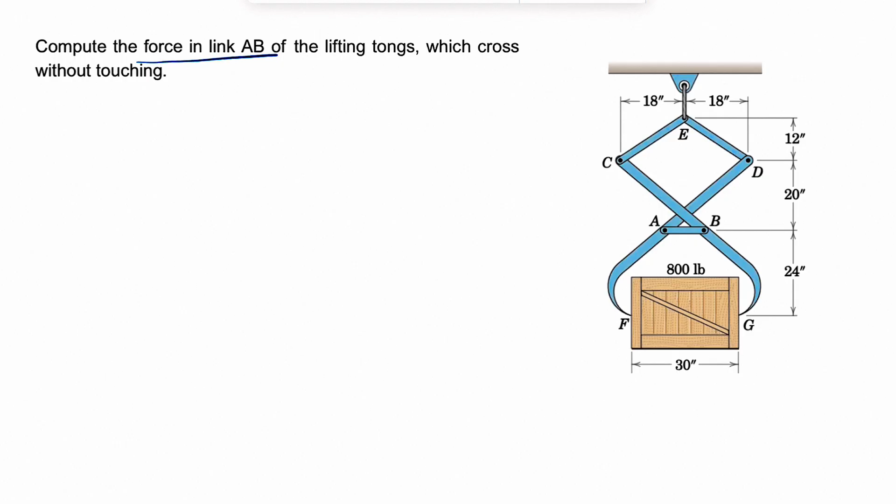Okay, so welcome back. We're going to be solving another question from chapter 4 of Engineering Mechanics by Meriam. In this one, we need to compute the force in link AB of the lifting tongs, which cross without touching. We're going to go with our equilibrium assumption, and we need to dismantle the system first of all. And what I'm going to do is draw the free body diagram for this part of the system.

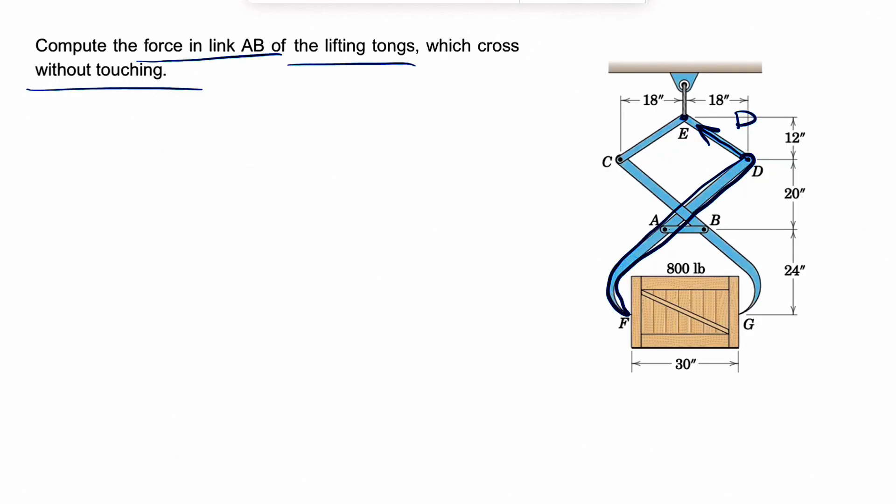And at point D, if we look at it, we'll see that we have a two force member DE, which means our force will be along this link ED. We can call it D. And we also have another two force member, which is the link AB, and that's what the question is asking us. So we're going to consider one force AB, and we have the forces at point F. We're going to consider two forces Fx, Fy, and we have our equilibrium equations. Sum of all forces in X equals 0. Sum of all forces in Y equals 0, and we're going to have one moment equation.

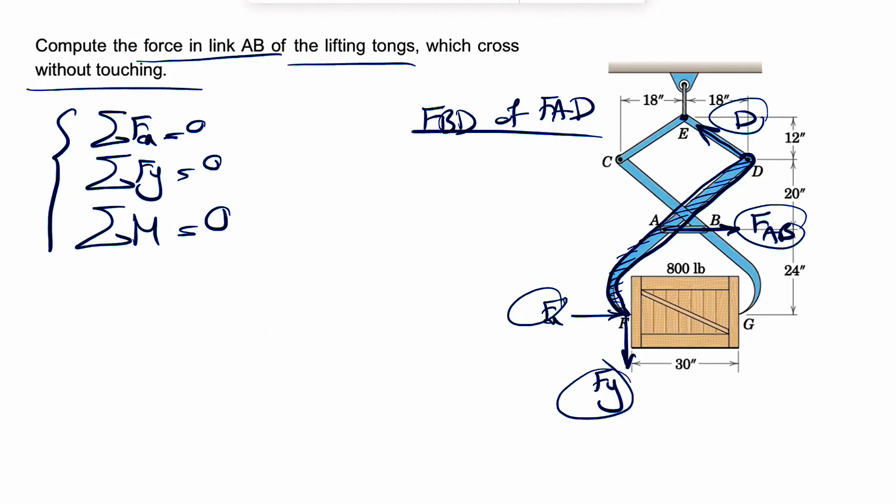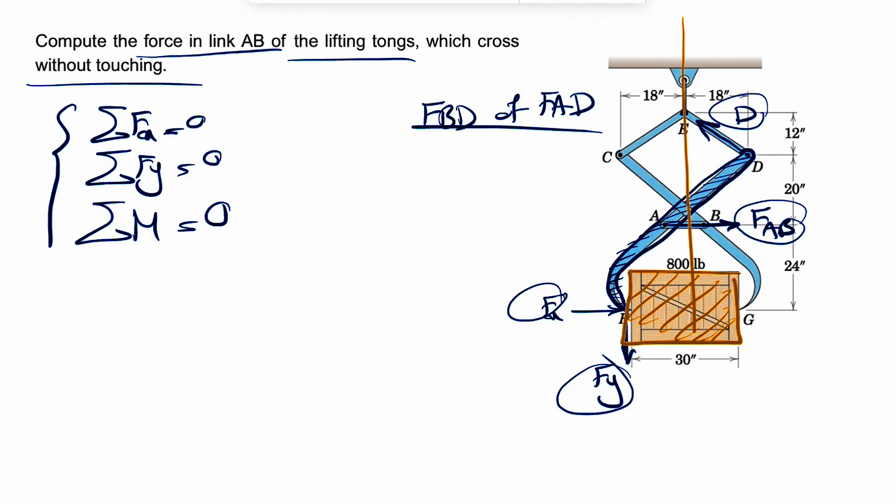Obviously, right now I'm drawing the free body diagram for member FAD, so the blue shaded area is the free body diagram of FAD, and we are writing our equilibrium equations for this specific member. So we can start with our equations for this member, but if we look at it, we'll see that we have 1, 2, 3, 4 unknowns, which means we can move on to another member to figure out some of these unknowns. And I'm going to draw the free body diagram for this box, and we can see that the figure is symmetrical, so whatever we have on the left half of this figure is going to be the same on the right side too.

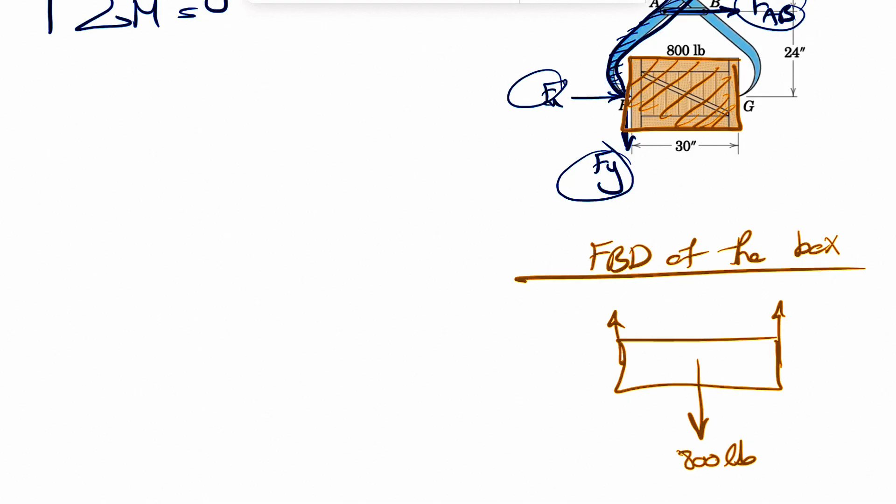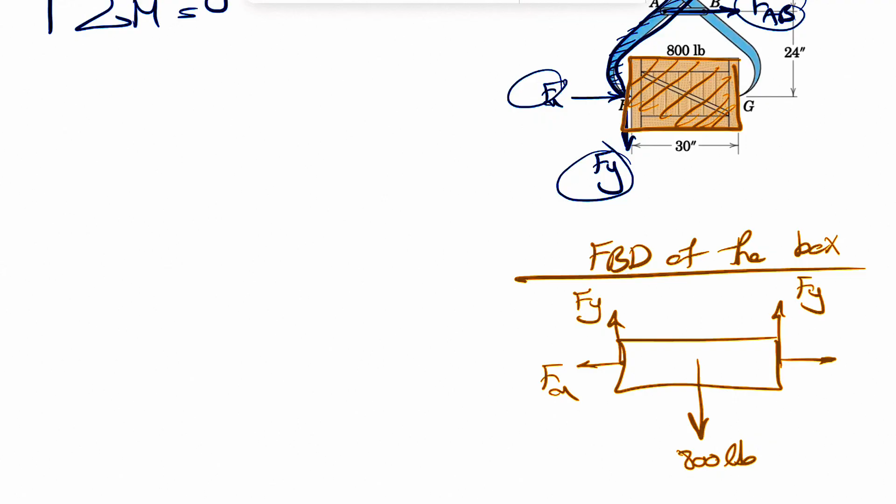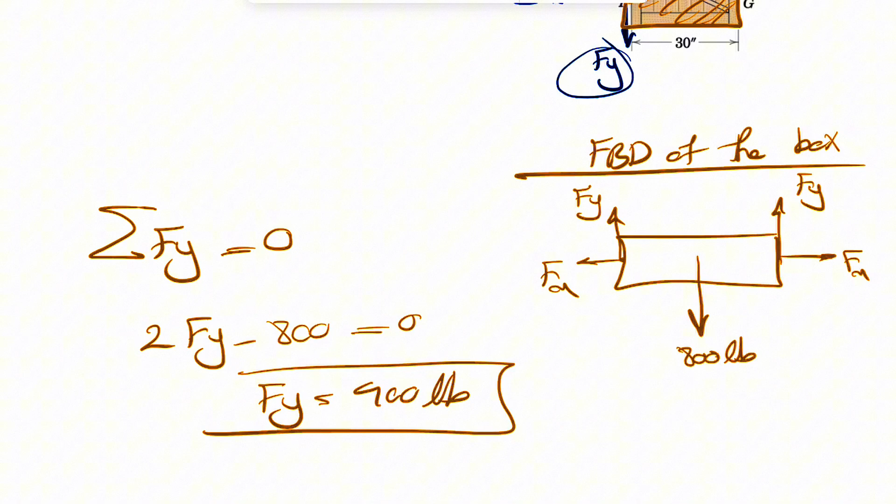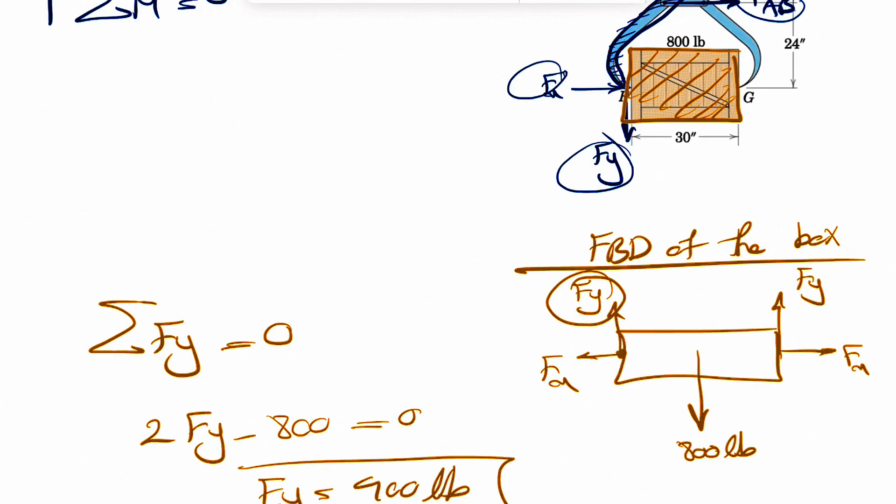So if we draw the free body diagram of the box, what we're going to have is the weight of this box, which is 800 pounds. And obviously we have two forces on the left and right, and we can consider two forces in the X direction too. So we can call them Fy. The other side, we can call it Fy or Gy, again, because of the symmetry they are the same forces, Fx here, Fx here too. But for this one, if we just do sum of all forces in Y equals 0, we should be able to find Fy, because we're going to have 2Fy minus 800 equals 0, so Fy will be 400 pounds. So now that we have this, we can use this information in the previous part. And keep in mind that Fy is upward in here, which means it has to be downward in the member FAD because of Newton's law, same force, just in the opposite direction.

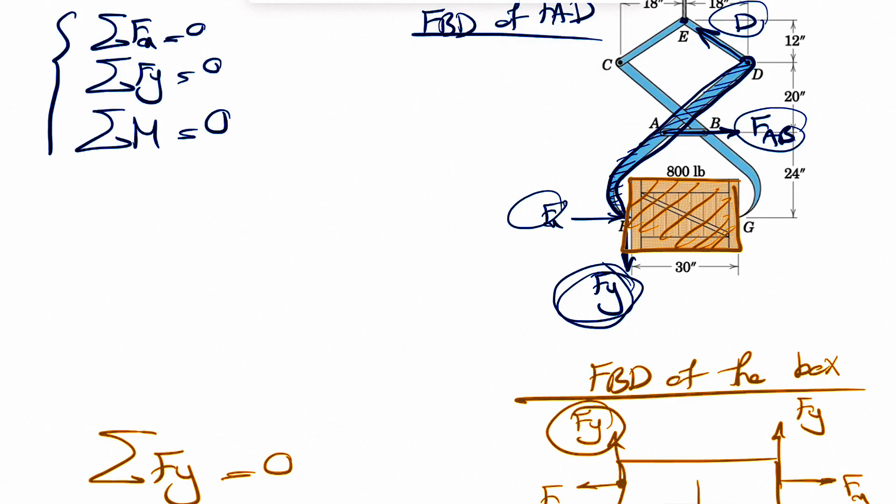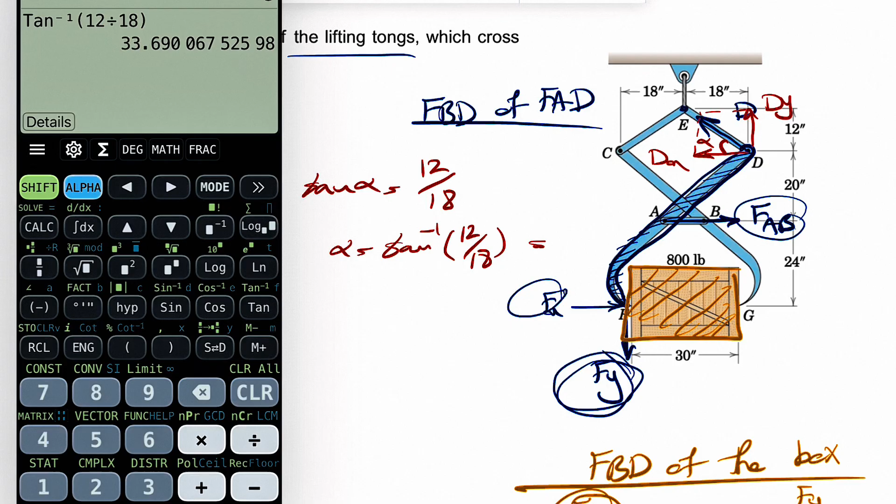So now that we have Fy, it is easy enough to find the Y component of the D. If we try to resolve this force, it's going to be Dx and this is going to be Dy. Finding this angle is pretty easy because we have all the dimensions. Let's just call that angle alpha. So the tangent of alpha would be the opposite, which is 12 divided by 18. So alpha would be tangent inverse of that value, 12 over 18. Let's see what we get. So tangent inverse of 12 divided by 18 is going to be 33.69 degrees.

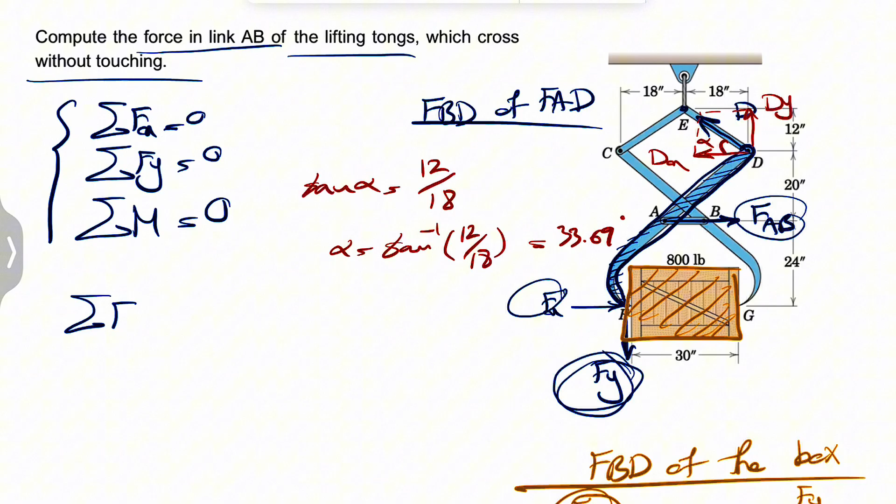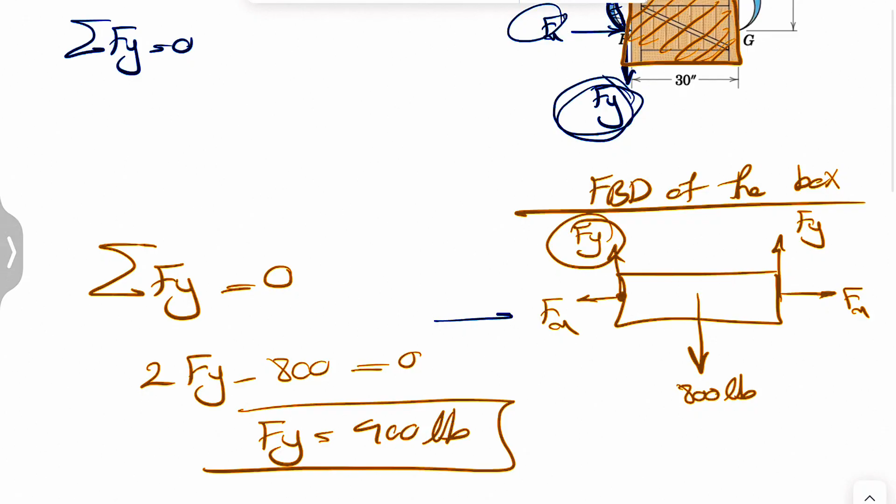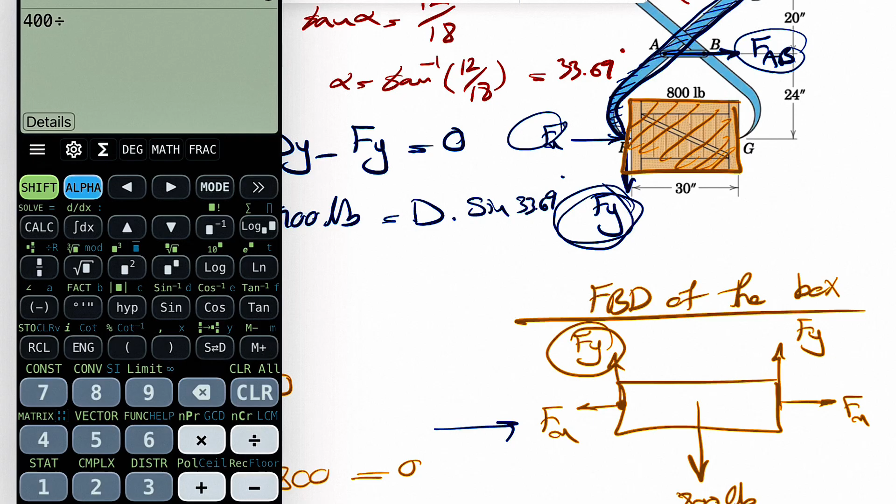And the reason I did that is because if we use our Y equation equals 0 for this free body diagram, again, everything is color coded. The blue writing is for the free body diagram of FAD, and the yellow was for this. So basically we have Dy minus Fy equals 0, which means Dy is Fy, which was 400 pounds. And we know this is equal to D, the Y component would be D sine of alpha. So we can find the force D in here, which is 400 divided by sine of 33.69. So we figure the D. The only unknown in here now that we are looking for is FAB. Actually, it's not the only unknown because we have Fx too, but we don't care about that.

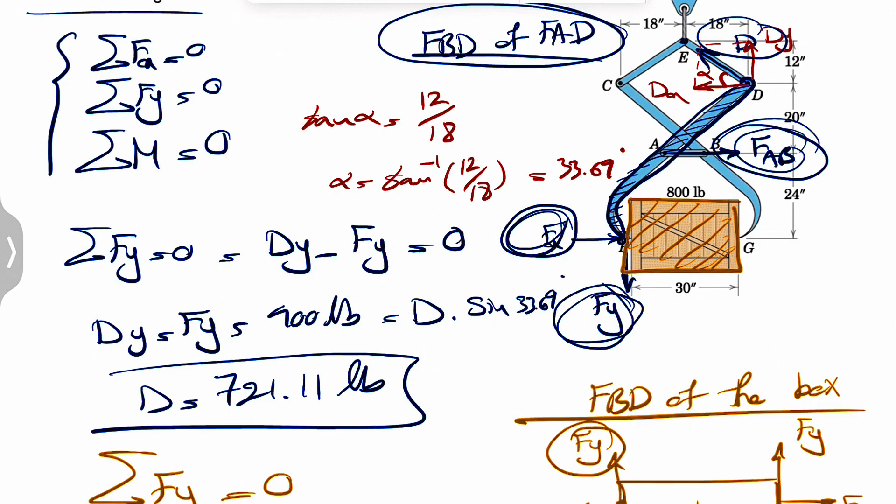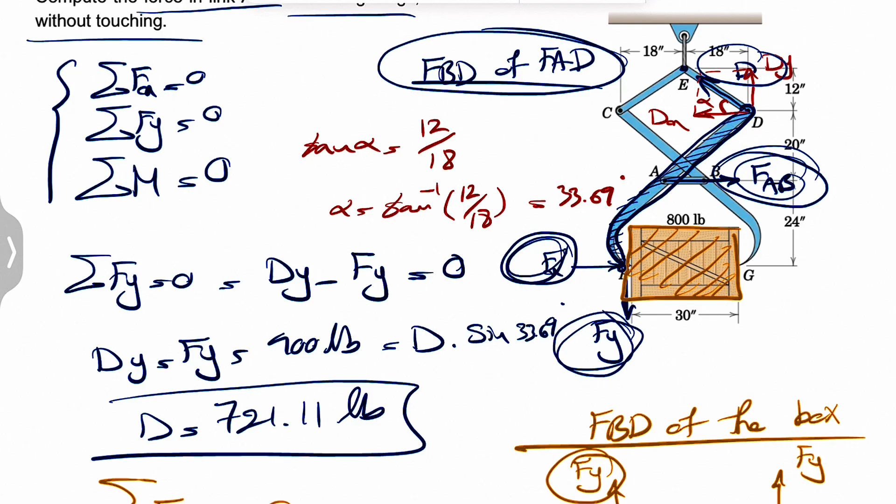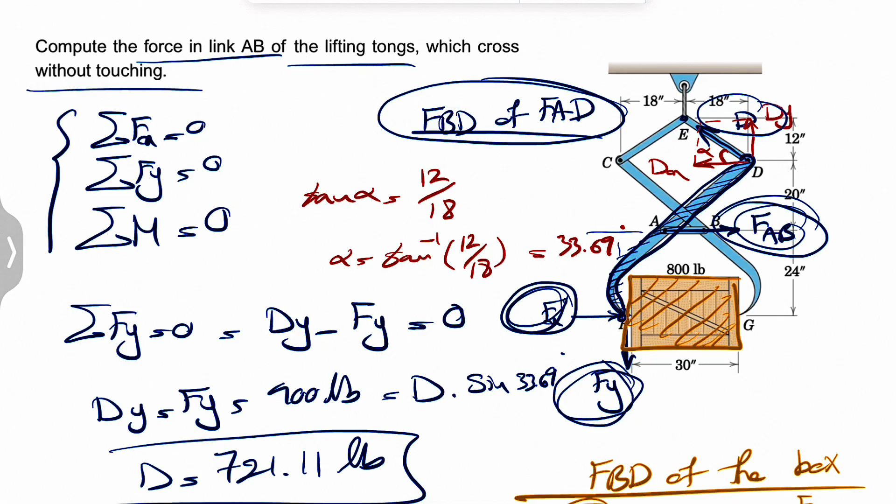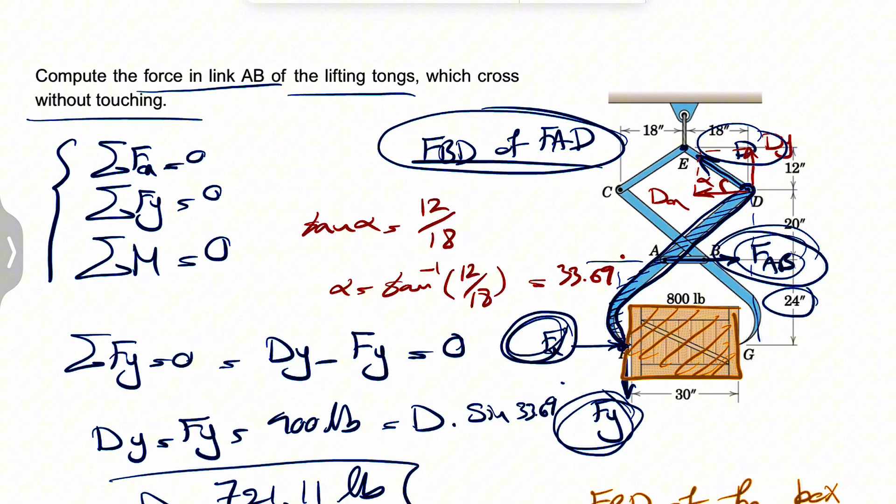If you just find the moment about point F, counterclockwise positive, we should be able to find the FAB. So we're going to have the moment of FAB, which is a clockwise moment. So negative FAB times the distance. The vertical distance from F to the line of action is 24 inches. And we're going to have the moment of the Dy. As we can see, it's a counterclockwise moment. So Dy was 400, so plus 400 times the distance from F to the line of action of the D, which is basically this 30 inches plus that little distance that we have in here.

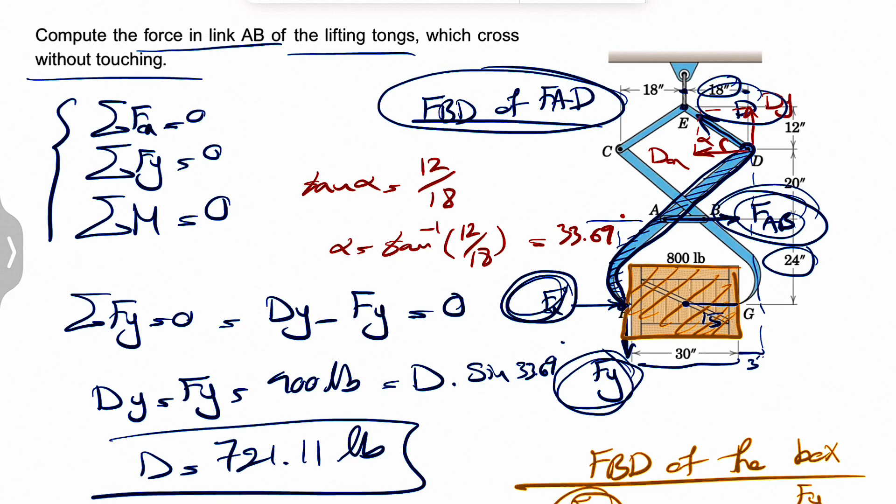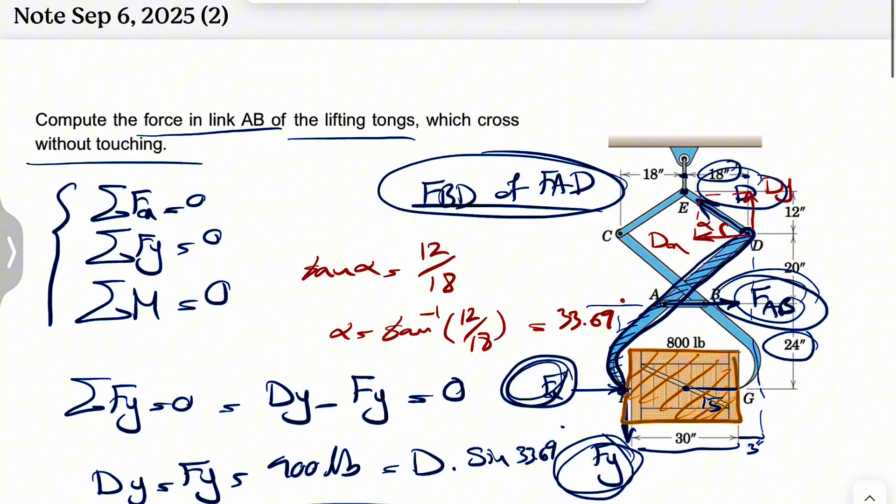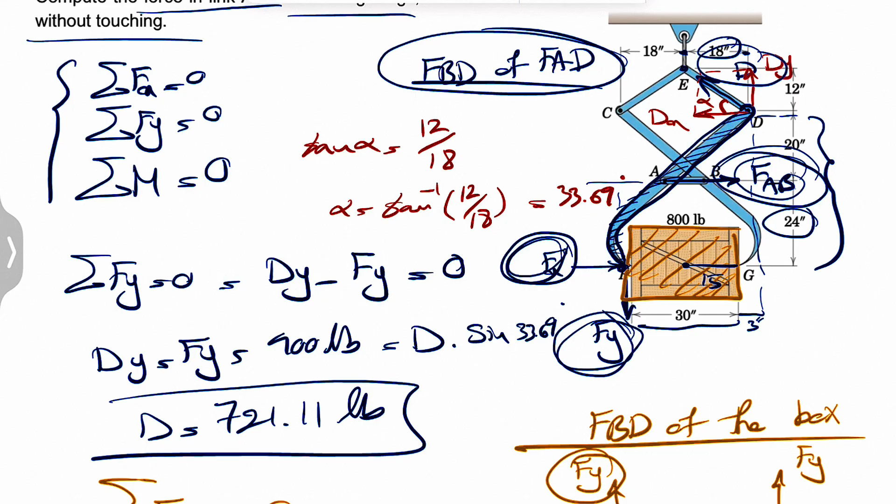And for finding that, we know this distance is 15 and we have this distance 18. So if we just subtract those, we're going to get this little distance, which is going to be 3 inches. So plus 3. And we're going to have the moment of the x component, the cosine of the angle, which was 33.69. We figure out the D, this is going to give us 600, and the distance for this one is also pretty easy to find. So we have 20 plus 24 equals 0, and this should give us the FAB that we are looking for.

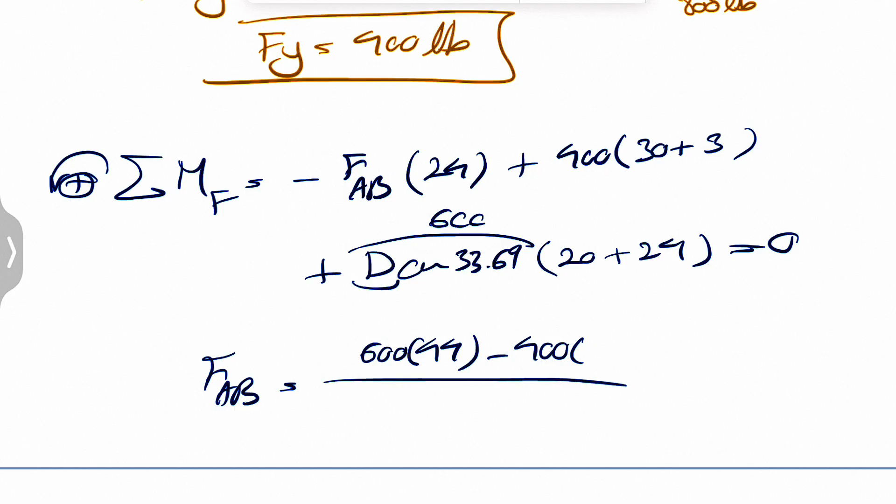So 600 times 44 minus 400 times 33 divided by 24. So 600 times 44 minus 400 times 33, divided by 24. Sorry, I have a positive sign in here. And yeah, this is going to give us 1650 pounds for the force.

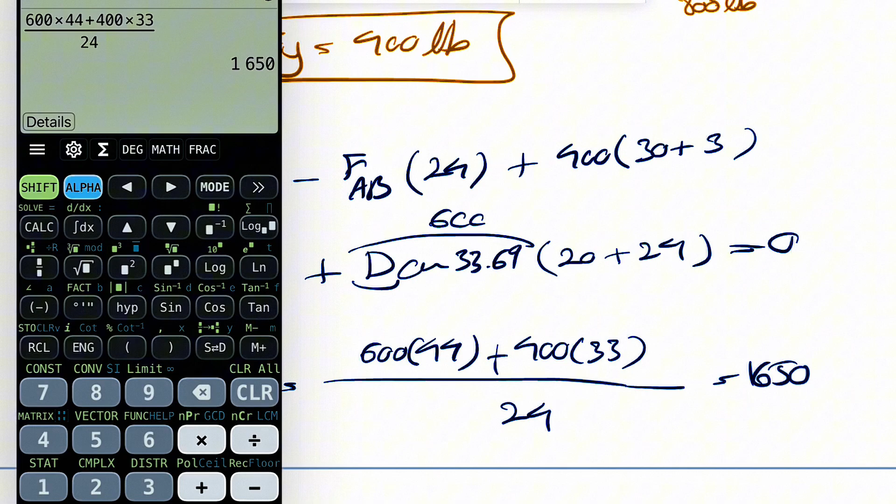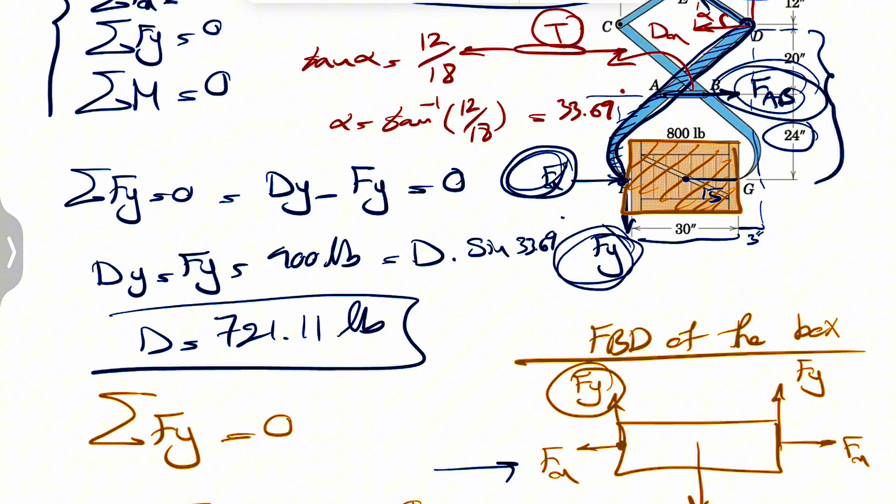So the direction for the FAB is actually correct, which means the member AB in here will be in tension. Based on Newton's law, this has to be in the opposite direction of this force. So the member is in tension. And yeah, that's the final answer for this question.